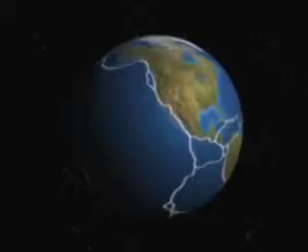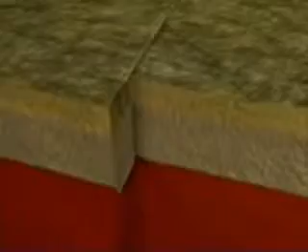What does cause the earth shaking? There are fractures in the earth. Big blocks of lithosphere of the earth periodically shift over these fractures. These shifts bring to abrupt movements of the earth's layers relatively to each other, thus generating seismic waves. Seismic waves shake the earth.

How may one save his life during strong earthquake? The only way is to construct seismic-resistant buildings. Why is this not applied all over the world? The answer is trivially simple. Seismic-resistant buildings, comparing with non-seismic-resistant buildings, are very costly, higher by tens and 100 times. Neither majority of people nor big countries can afford acquiring such seismic-resistant buildings.

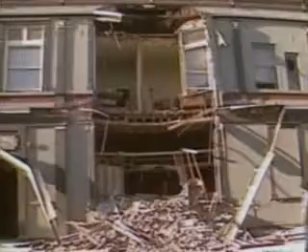Is it possible to decrease the cost of seismic-resistant constructions, taking into account that in many densely populated countries located in seismic-active regions, majority of population lives in small, private 1-2-story buildings? They get destructed even at earthquake of 6. The point is, even buildings constructed by frame house technique are non-seismic resistant ones.

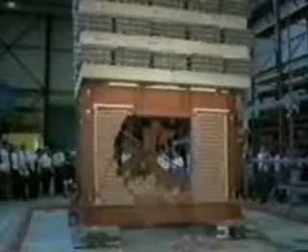Look at the results of bench tests conducted by Japanese scientists. Mechanical connection of brickwork with concrete framework is weak, and eventually it is destructed at first shocks of earthquakes with force of 6-7.

What is an ideology of seismic resistant construction? There are several main ways to construct seismic resistant buildings. For example, flexibility of blocks between floors of buildings is to be the main issue. Rather expensive and complex systems of connection between blocks are applied, which enable building to bend and to move at zones of joints of floors, but for all that not to be destroyed.

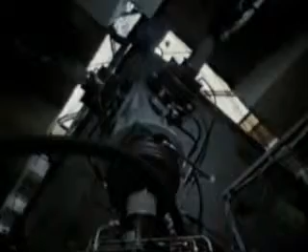For example, systems of seismic isolation are much diversified. Seismic isolation isolates the upper part of buildings from surface of the earth during earthquakes. Foundation of buildings executed as peculiar sliding and shaking supports. Thus, foundation of building starts moving with oscillatory movements, whereas the building itself, as a result of inertia, as if slides over foundation.

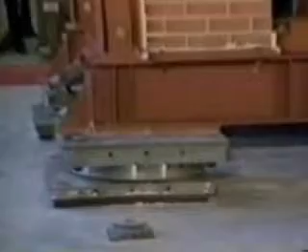Another system of seismic protection is based on application of the so-called shock absorbers. These are special devices located on roof or upper floor of building with system of flywheels or counterbalances, which start generating oscillations similar to seismic ones but in antiphase. Thus, they as if compensate seismic fluctuations and do not allow building shaking and destructing.

The most seismic resistant modern buildings are constructed with application of complete steel constructions and floors made from light synthetic multi-layered panels. All this costs much. The Scientific Research Institute on Prediction and Study of Earthquakes of International Academy of Sciences selected basically new way.

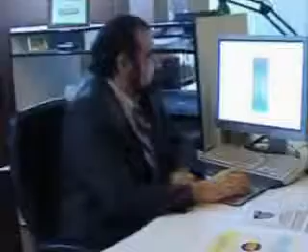Under leadership of the director of the institute, the vice president of the Eastern European section of International Academy of Sciences, Doctor of Geology and Mineralogy Sciences, Professor Elchin Khalilov, it became possible making seismic-resistant construction of new generation, but first of all, buildings which are not expensive and affordable by majority of people of modest means.

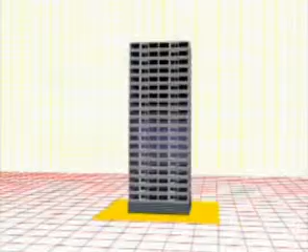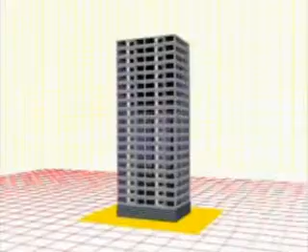Building constructed by new technology is also able to bend and to change shape at large earthquakes, but it significantly differs from existing seismic-resistant structures. The floors themselves in other types of seismic resistant constructions are rigid and joints between them are flexible. Each point of the building in new construction is a joint of bending or a joint of shift.

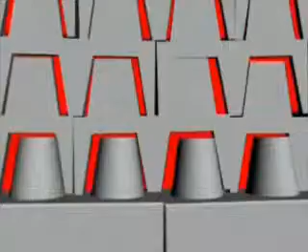Speaking simply, building made of seismic resistant blocks may be subjected at any point to bending and to change its shape, but nevertheless it does not crash. At the same time, after passage of seismic wave, building restores its initial shape. How does this take place? Let us cite an example. The principle of new technology of seismic resistant building is similar to this.

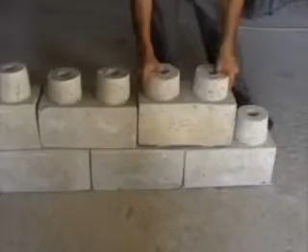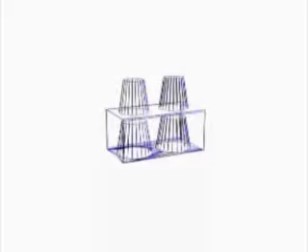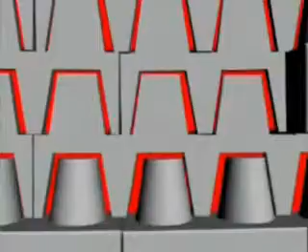Damping substance. Professor Khalilov's know-how is applied at joints of blocks. This substance prevents blocks from destroying at big acceleration of shift and plays a role of shock absorber. Thanks to this, the building returns to its initial position. Each joining of seismic resistant blocks is a hinge. Thus, the whole building consists of solid hinges, preventing its destruction.

The most important property of interconnection of seismic blocks is the possibility of their restricted movement and turning relative to each other in all planes. Blocks are also able to move with elastic oscillation movements in the horizontal plane.

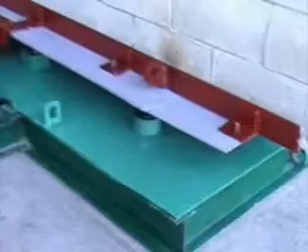With the aim to study the effectiveness of seismic resistant blocks in practice, a special seismic test bench imitating oscillations of ground at large earthquakes was established. What does this device represent? It is a rigid platform where a vibrating platform is installed on special springs. The vibrating platform is set in motion by means of a special vibrator.

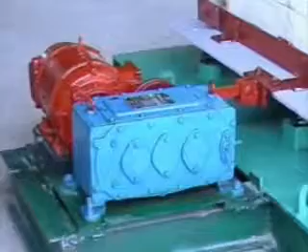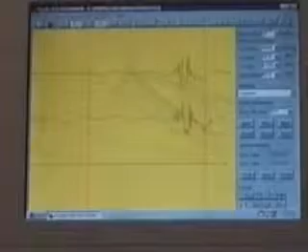A three-component seismic sensor connected with a digital seismic station is installed on the vibrating platform. Subsequent analysis of records of the seismic station allows controlling and studying, with big accuracy, accelerations and intensity of the imitated earthquake.

But how will blocks of natural size behave? As everyone knows, it is impossible to take into account all technical nuances during construction of a model. Vertical steel pins are rigidly fastened to the vibrating platform, imitating the surface of the earth. These pins traverse holes in seismic blocks to a height of 3 rows of bricklaying. The same fastening is envisaged at construction of buildings.

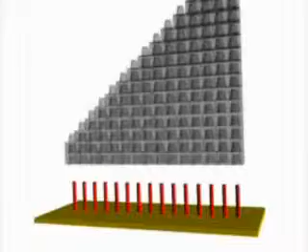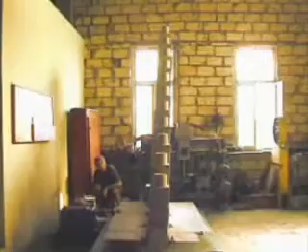The experiment has proceeded further, the situation becomes strained. If at every amplitude of oscillation one increases time of influence, then intensity of the earthquake will continue increasing. Intensity increases up to 10-12. However, the wall continues swaying as if nothing happened. Simply, earthquakes lasting for 25-30 minutes are not observed in nature. Tests surpassed all expectations. Then conditions of the experiment get more strict.

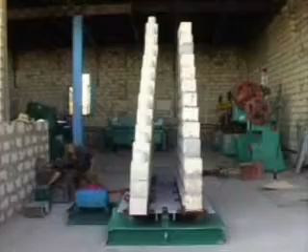Amplitude of oscillations increases, the force of the earthquake reaches intensity of 7.5 and 8. As it is seen, amplitude of oscillations of walls is rather high. Thus we see the wall made of common construction stone does not stand. It breaks horizontally almost in the middle. A broken piece of the wall falls on the second wall, made of seismic resistant blocks.

The hearts of developers sink. Will the collapsed wall crush the seismic resistant wall? The seismic resistant wall remained safe in spite of the blow, and that piece of broken wall presses on it. Experimenters decide to follow on. At last, the culmination point comes. The broken piece and balanced part of the wall made of common blocks get destroyed immediately at several places. At that, part of the broken wall falls once more on the seismic resistant wall.

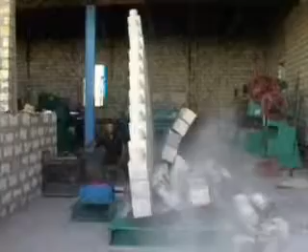Let us see this process in slow motion. One may observe the blow is very strong. All persons are sure the seismic resistant wall will not stand the additional mechanical blow. However, it stands contrary to all expectations. This is really a great success of the author and the team of developers of seismic resistant construction blocks.

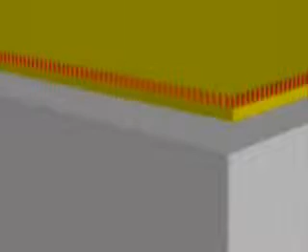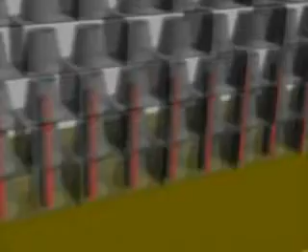Why doesn't the building collapse? What makes it stand? The point is the peculiarity in fastening of the building itself to the foundation. Steel pins are walled along the perimeter in the concrete foundation of a building, firmly set on the earth's surface with application of steel piles. The first 3-5 rows of seismic resistant construction blocks are put on these steel pins, depending on height of the building. Steel pins provide flexibility of cohesion between the lower part of the building and the static foundation.

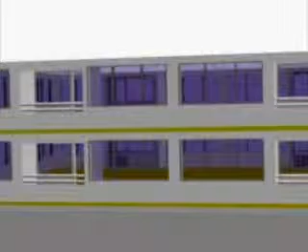Thus, connection with concrete blocks between floors is established. Steel pins are walled into concrete floors by perimeter and enter by their lower part into holes of seismic blocks of the lower floor and by their upper part into holes of seismic blocks of the upper floor. Thanks to this, flexible and solid connection between floors and concrete coverings is established. By the way, construction of buildings does not exclude possibility of additional application of seismic isolation technology.

Both seismic resistant skyscrapers up to 10 floors and low buildings, particularly cottages, villas, private houses, summer cottages, may be constructed on the basis of seismic resistant construction blocks. The author and developers guarantee seismic stability of buildings made of seismic blocks at earthquakes up to 11 on the Richter scale.

Cost of seismic resistant buildings made of seismic resistant blocks. Calculations made in the Scientific Research Institute on Prediction and Study of Earthquakes indicated the cost of buildings constructed on the base of Elchin Khalilov seismic blocks will be at maximum 10–15% higher than the cost of construction of common non-seismic resistant buildings constructed on skeleton basis or from construction brick.

Decrease of cost of construction of buildings based on seismic blocks is achieved thanks to exclusion of cement solution in wall laying, simplicity of the construction process, and relatively low cost of the seismic blocks themselves.